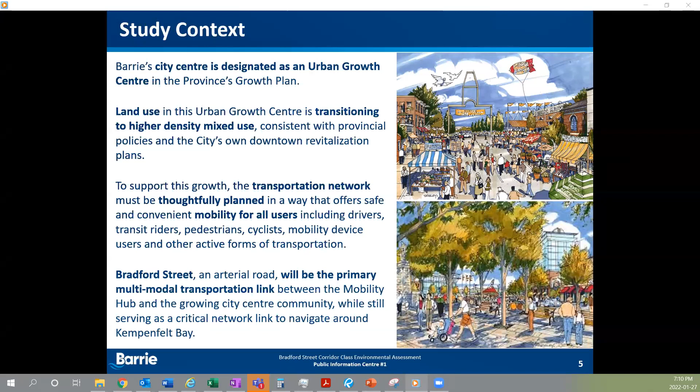To support this growth, the transportation network must be thoughtfully planned in a way that offers safe and convenient mobility for all road users, including drivers, transit riders, pedestrians, cyclists, mobility device users, and other forms of active transportation. This study is focused on long-range corridor planning to confirm future multimodal needs on Bradford Street.

Multimodal transportation planning considers the needs of different road users to plan for and build a network that offers transportation options that are accessible and effectively integrated. This study is considering the future needs of active transportation users, transit, and vehicles over the next 3 decades.

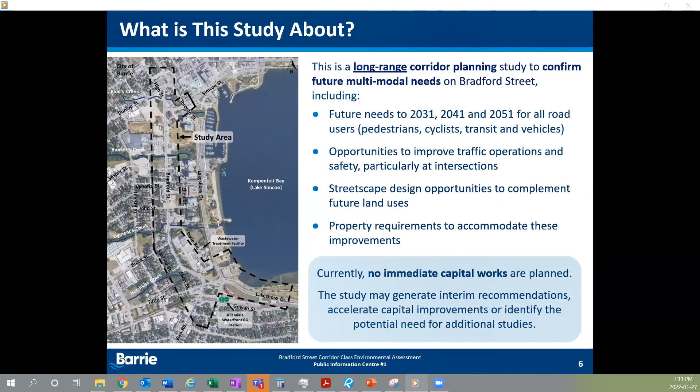The study will also identify opportunities to improve traffic operations and safety, streetscape design to complement future land uses, and the property required to accommodate these improvements. Currently, no capital works are planned for Bradford Street. However, this study may generate interim recommendations that could be considered in the short term.

The Municipal Class Environmental Assessment process is a planning and approval framework for municipal infrastructure used to identify possible adverse effects of proposed infrastructure projects on the environment. Given the scale of the study, our Class EA process has 4 primary phases, each with opportunities for agency, public, and Indigenous community engagement. We are currently in phase 2 of this process and are hosting this PIC to review

the background information gathered and problems and opportunities identified in phase 1, and the alternative solutions that are being considered in phase 2. Based on the feedback gathered through this PIC, the alternative solutions will be assessed and the preferred solution for the corridor will be confirmed and presented at PIC number 2.

Thereafter, the study will progress to developing design alternatives in phase 3. In phase 4, an environmental study report will be prepared to document the study recommendations and decision-making process. This report will be available for public review at the end of the study.

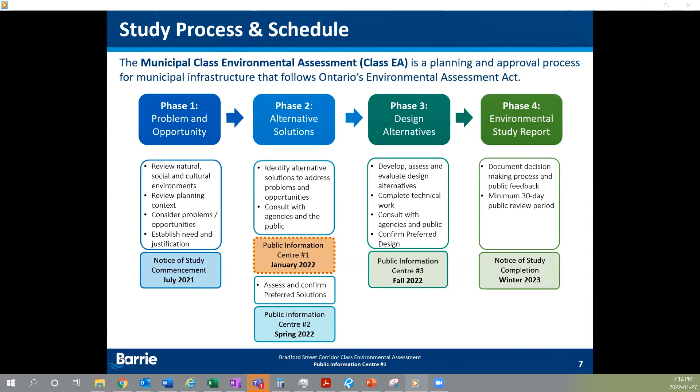Barrie's growth forecasts are based on the province's growth plan. Barrie is currently planning for a population that will almost double in the next 30 years. The city's urban growth center will be the focus of intensification to accommodate planned growth.

The city will manage this growth through the construction of high-density, mixed-use developments in the city center and improving access to more sustainable mobility options like walking, cycling, and transit, while creating safer and more attractive streets.

Taller residential buildings will be encouraged, which will capitalize on the nearby waterfront as a key development attraction. Residential developments will be accompanied by commercial spaces that enable people to live and work within a completed, urban-friendly, walkable community.

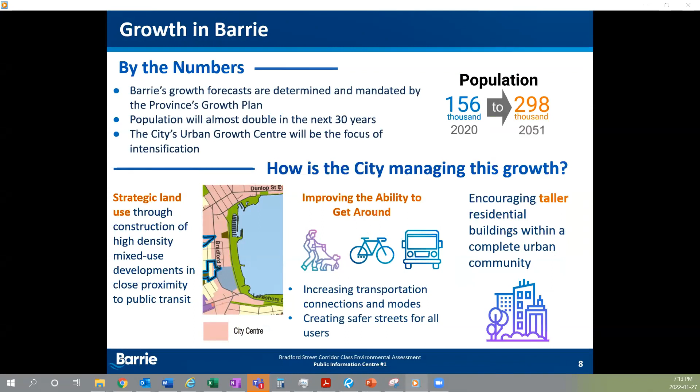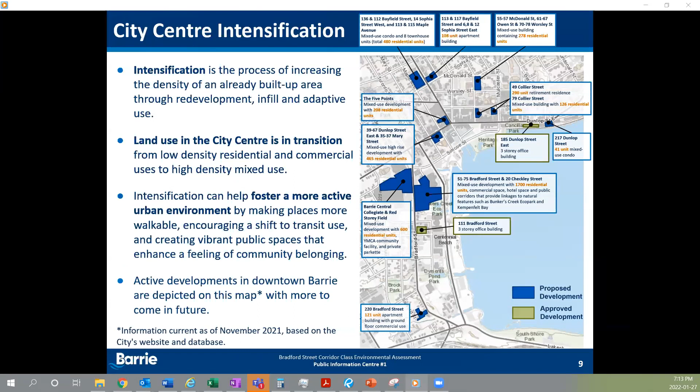Intensification is the process of increasing the density of an already built-up area through redevelopment and infill. This slide illustrates the intensification underway in Barrie's downtown. Active developments are highlighted in blue on the map. This intensification will help foster a more active urban environment by making places more accessible to walking and cycling and creating more vibrant public spaces to enhance a feeling of community.

The city's 2019 Transportation Master Plan, or TMP, provides direction on transportation investments to 2041, with a focus on providing safe, efficient, and accessible mobility choices. For Bradford Street, the TMP includes a few key findings and recommendations.

The existing 4 lanes will provide capacity for traffic volumes forecast to 2041. Therefore, no new travel lanes are being proposed. There is a desire to attract traffic away from Lakeshore Drive. Therefore, Bradford Street must offer a good level of service for vehicular traffic and transit. Space should be protected for a 2-way center left turn lane or median to provide flexibility in meeting future needs.

Tiffin Street intersections operate poorly now, and this issue will continue to worsen. Therefore, intersection improvements are needed.

There is also a need to enhance mobility and provide a sense of livability and safety in the streetscape. Cycling facilities and an improved pedestrian and street environment are required to support these objectives.

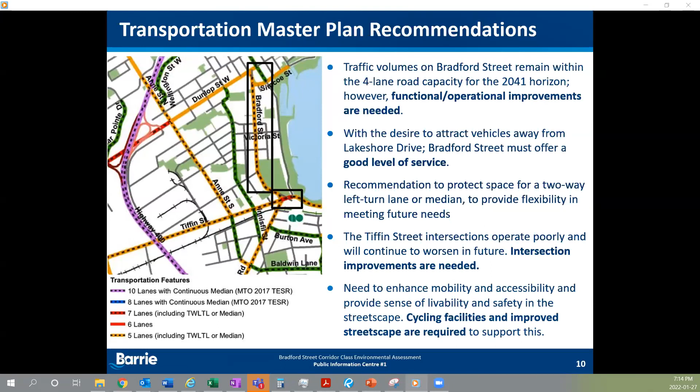Building on the TMP, the Bradford Street Class EA will be taking a closer look at traffic operations in the corridor to 2051 to identify further issues and needs. This could include intersection reconfiguration, additional turning lanes, traffic signals and signal timing, and/or other modifications.

The city's TMP also includes a comprehensive active transportation strategy that provides a blueprint for enhancing walking and cycling infrastructure, accommodating planned growth, and improving mobility options and equity. The TMP recommends a cycle track on Bradford Street, which is aligned with the city's vision to offer a continuous, well-connected, and safe active transportation network for residents and visitors that supports recreational and commuter active transportation opportunities, enhances connectivity to key destinations, and increases mobility for users of all ages and abilities.

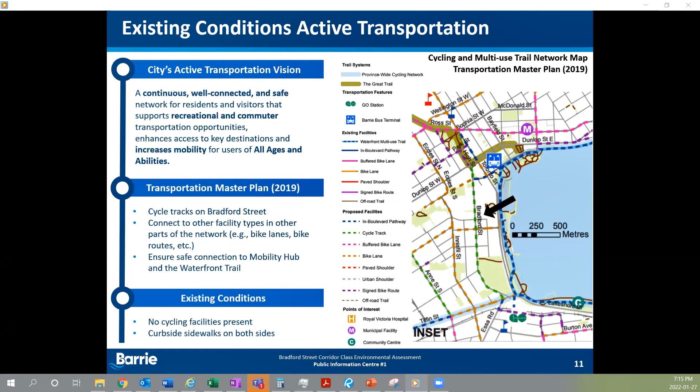Today, there are no cycling facilities on Bradford Street. We will use the recommendations of the Active Transportation Strategy and the recently updated Ontario Traffic Manual Book 18 to develop a cycling facility for the corridor.

Factoring into our decision-making about the future needs of Bradford Street is the Allendale Mobility Hub, an interregional transit hub at the Waterfront GO station, to coincide with the arrival of all-day GO service to Barrie. This transit hub will provide a geographically centralized hub within the city and increase transit access to the GO station.

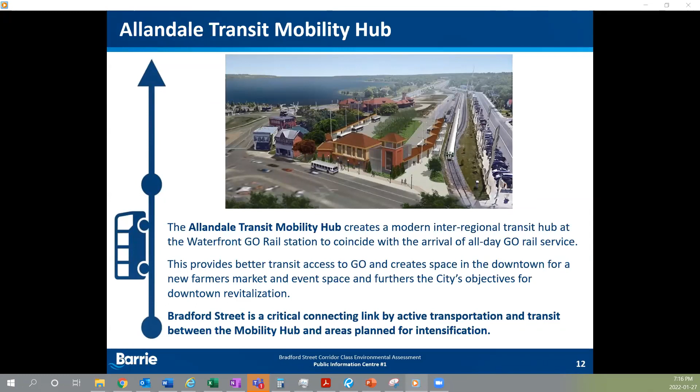Bradford Street will be a critical multimodal transportation link between the mobility hub, the downtown mini hub on Maple Avenue, and areas for planned intensification.

The next few slides focus on the existing conditions of the corridor, starting with land use. The existing land use around Bradford Street is a mix of low-density residential houses and commercial businesses, with some institutional uses, including city offices and the Barrie Wastewater Treatment Facility towards the south end of the study area.

As we have highlighted on previous slides, land use along Bradford Street is planned for transition to higher density mixed use, consistent with the city's official plan. We are taking an integrated approach to transportation planning in that we are considering not only potential impacts to existing land uses, but we are anticipating how the future community will look and their needs.

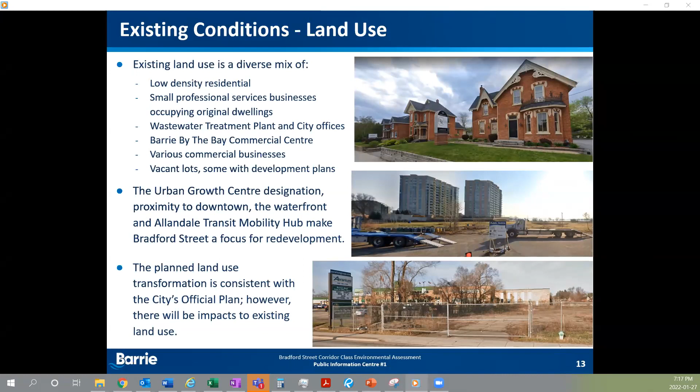A review of the natural environment is being carried out in support of this study. Natural environmental features in the study area are limited to four creeks flowing into Kempenfelt Bay. These creek corridors are narrow and consist of culturally influenced vegetation communities typical of urban settings. There were no species at risk or potential habitat observed in the study area, and habitat potential is limited to urban adapted wildlife. As the study progresses, we will identify potential impacts to these watercourses and recommend mitigation measures to protect the natural features.

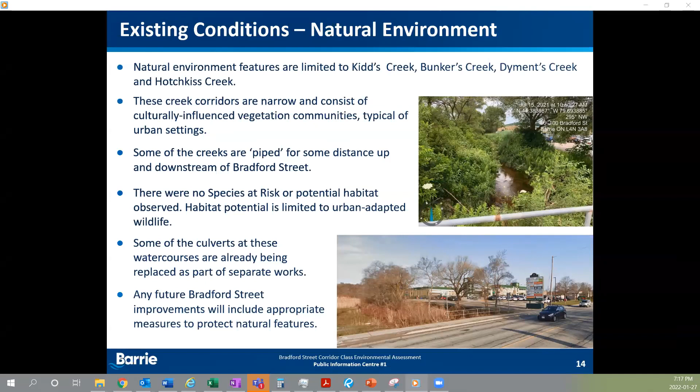A cultural heritage report has been prepared to inventory known and potential built heritage resources and cultural heritage landscapes in the study area. Background historical research is used to determine the presence of sensitive heritage features that correspond to 19th and 20th century settlement and development patterns.

In addition to this research, the Ministry of Heritage, Sport, Tourism and Culture Industries screening tool and professional expertise is used to identify properties as potential built heritage resources and cultural heritage landscapes.

A number of potential and known heritage resources have been identified in the study area, including three properties on the Municipal Heritage Register. The Allandale Station, designated under the Ontario Heritage Act, is located adjacent to our study area.

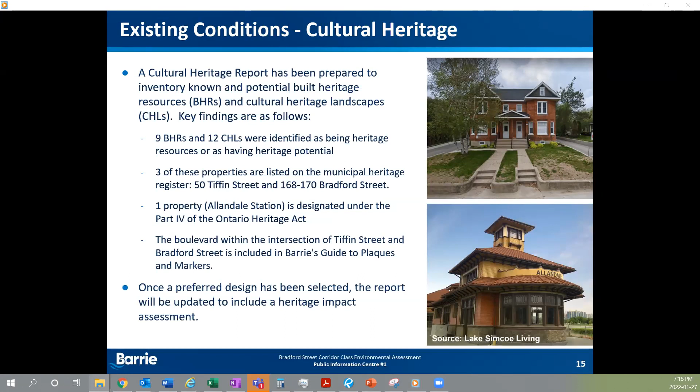Heritage resources will be considered through the decision-making process. Once a preferred design has been selected, the report will be updated to include a heritage impact assessment and recommend mitigation measures. This map depicts the location of identified built heritage resources and cultural heritage landscapes in the study area.

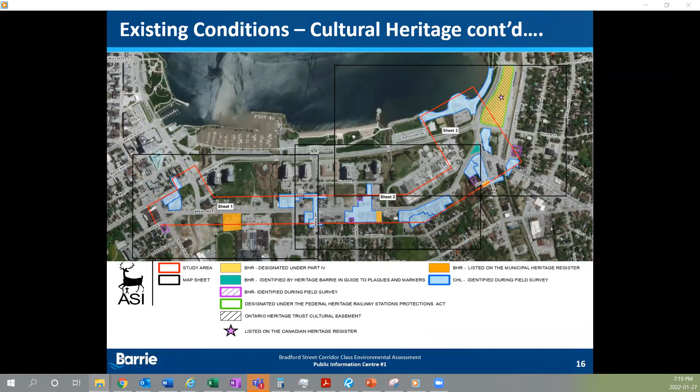A Stage 1 archaeological assessment has been completed for the Bradford Street corridor to assess archaeological potential and confirm where further archaeological assessment is required. Some properties where redevelopment is already proposed have been previously assessed and will not require further study. Other areas exhibit archaeological potential and will require a Stage 2 assessment prior to any future construction.

The Allandale Station is an ancestral Huron-Wendat village and ossuary with established cultural heritage value. A Stage 4 archaeological excavation is in progress, and outcomes will inform the remaining work and detailed recommendations for the remainder of the property. The city is extremely sensitive to the cultural heritage significance of the Allandale Station lands.

If any potential impacts are proposed in this Class EA study, all appropriate work will be undertaken to protect cultural heritage values in partnership with Huron-Wendat First Nation and the Williams Treaty First Nations.

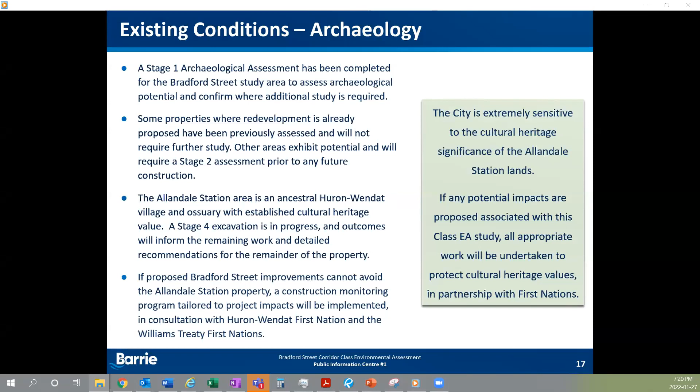This slide provides an overview of the general transportation conditions in the corridor. Bradford Street serves an arterial function in the city's downtown, providing a north-south connection around Kempenfelt Bay.

The existing roadway generally has a 20-meter right-of-way with 2 travel lanes in each direction and curbside sidewalks on both sides of the street. The posted speed is 50 kilometers per hour.

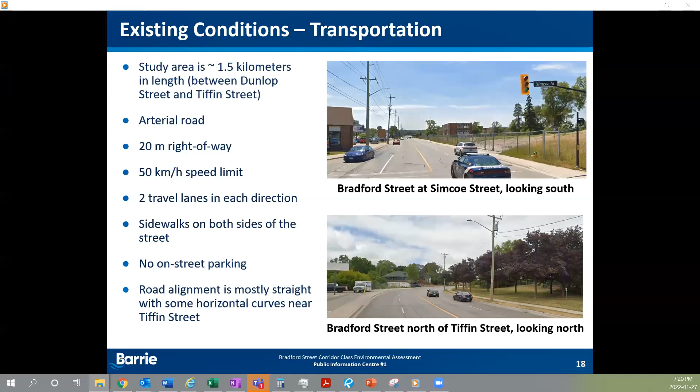The city's 2019 TMP considered future overall travel demand in the city at a network level and confirmed the 4-lane road capacity on Bradford Street is adequate for future growth up to 2041.

As part of this study, we are taking a closer look at intersection operations to better understand the specific needs in the area in 2031, 2041, and 2051.

In particular, the Tiffin Street intersections at Bradford Street, Essa Road, and Lakeshore Drive will become very congested with long delays and potentially unsafe operating conditions.

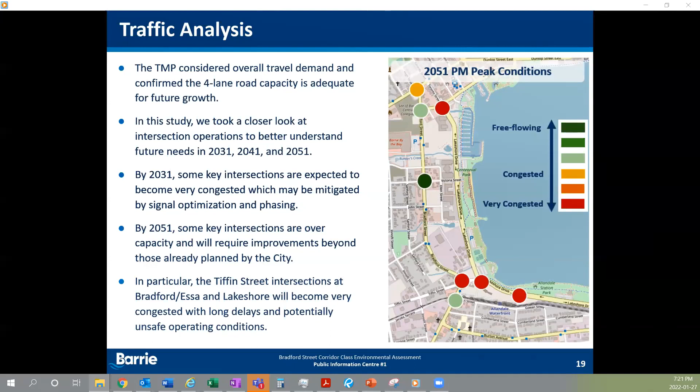The intersections at Tiffin Street are essential nodes in the transportation network because they facilitate movement around Kempenfelt Bay. In recent years, increased demand paired with the physical configuration and short distance between the intersections is causing a number of operational issues at this location.

The traffic analysis indicates that these operational issues will continue to worsen in the future, and the intersections are expected to be operating beyond capacity by 2031.

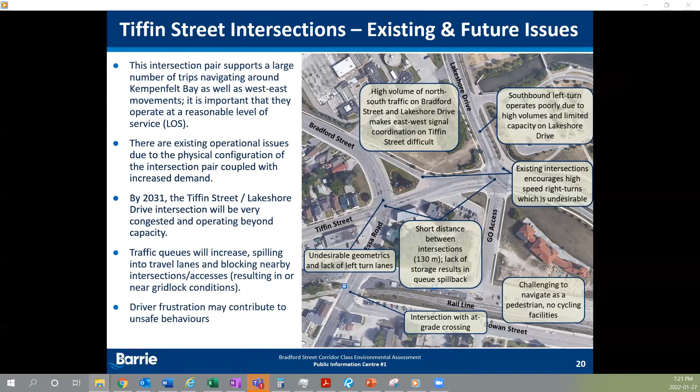Based on the background information gathered and reviewed, the planning context, existing and future conditions, and early stakeholder input, we have identified several problems, opportunities, and needs for the Bradford Street corridor.

These needs include the provision of active transportation facilities for users of all ages and abilities, improving the streetscape to create a vibrant and inviting downtown, and creating a multimodal connection between the Allendale Mobility Hub and downtown.

All the work up to this point has been setting the stage to develop a clear statement of the issues to be addressed by the study.

The overall objective is to continue to provide critical arterial road function and improve sustainable transportation options for users of all ages and abilities. The problem and opportunity statement emphasizes planning for continued community transformation in the city's urban growth center.

The statement also emphasizes the importance of Bradford Street as a critical link within the city's downtown multimodal transportation network, and the existing traffic operational and safety issues that will continue to worsen if not addressed.

And the opportunity to plan for the future needs of Bradford Street now and protect adequate right-of-way to accommodate cycling, improve the pedestrian and streetscape environment, and provide future flexibility for the city to improve the corridor in a way that promotes community activity and vibrancy.

A key question that came out of early stakeholder feedback was whether Bradford Street could be reduced to 2 travel lanes. The project team has included this option among the alternative planning solutions for review and consideration.

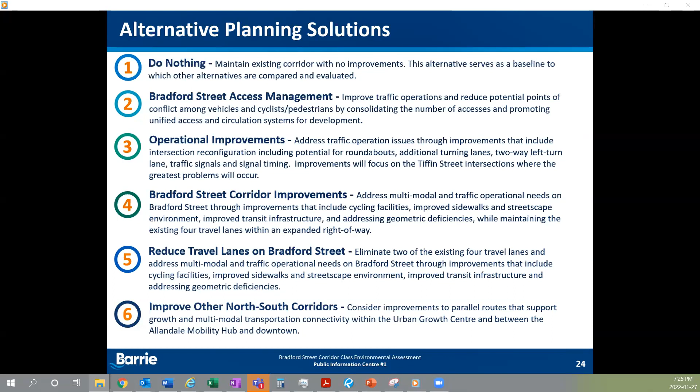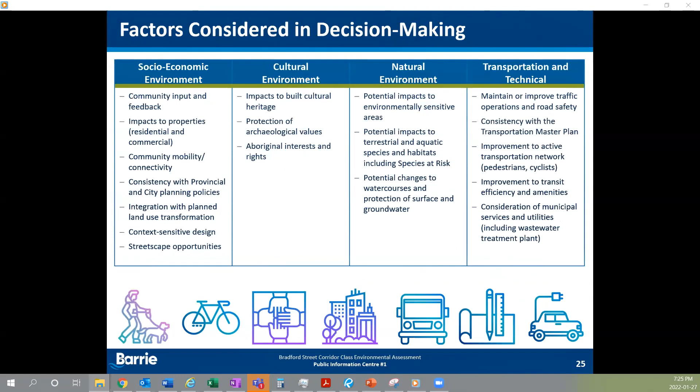The assessment and evaluation of the alternative planning solutions considers numerous criteria across a broad range of socioeconomic, cultural, natural environment, transportation, and technical factors.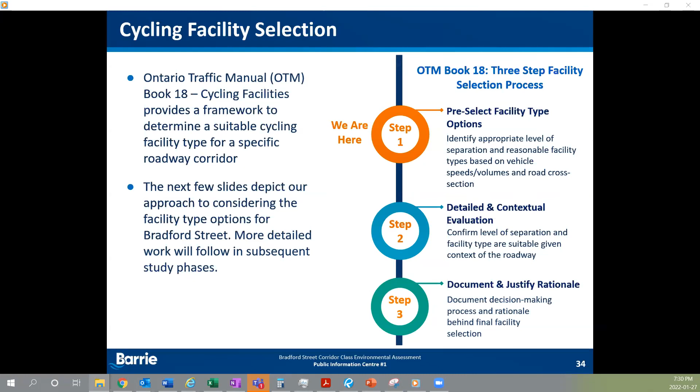Based on the posted speed and anticipated volumes on Bradford Street, physically separated cycling facilities are necessary. These facilities include elements such as curbs, planters, and bollards that provide physical separation between people riding bikes and motor vehicle traffic. Facility types include physically separated bike lanes, cycle tracks, and multi-use paths.

A key difference between physically separated bike lanes and cycle tracks is the elevation of the cycling facility. Physically separated bike lanes are on-street, whereas cycle tracks are elevated above the vehicle lanes. A distinguishing factor of multi-use paths is that they are shared by cyclists and pedestrians. The next few slides will present some different ideas of what these options can look like.

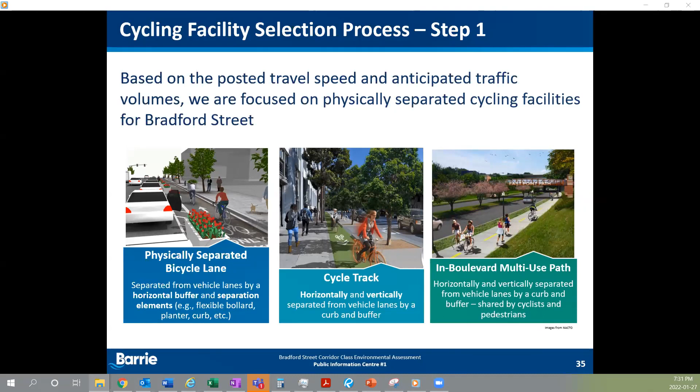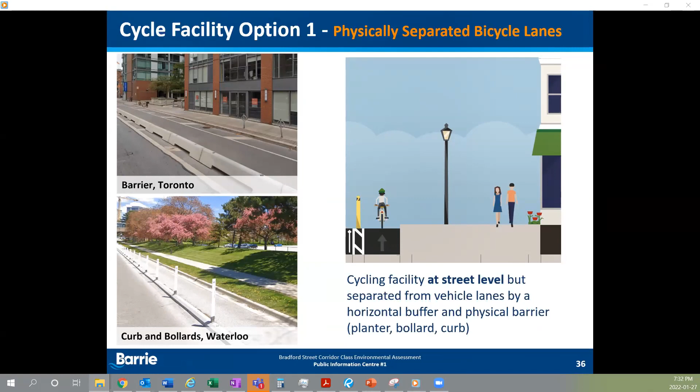Physically separated bike lanes are at street level and are separated from vehicle lanes by a horizontal buffer and physical barriers such as a planter, bollard, or curb. The physical separation provides most cyclists with a more comfortable riding environment compared to shared roadways or conventional bike lanes. It may not be as inviting as a facility that is horizontally and vertically separated from vehicles.

Cycle tracks are physically separated bikeways that are horizontally and vertically separated from vehicle lanes by a curb and a horizontal buffer. They are often parallel to the sidewalk, but are designated exclusively for people riding bikes.

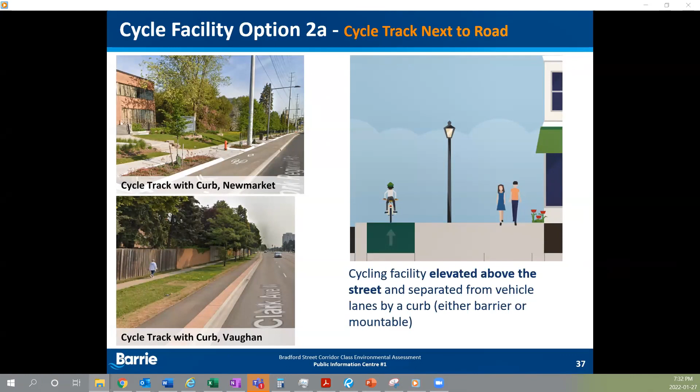We are considering two different locations for the placement of the cycle track in the Bradford Street corridor. The different placements may offer advantages from an operations and maintenance perspective, such as snow storage and winter clearance. In this example, the cycle track is located next to the roadway. In this option, the cycle track is located between the boulevard and the sidewalk. The boulevard provides more separation between the roadway and cyclists.

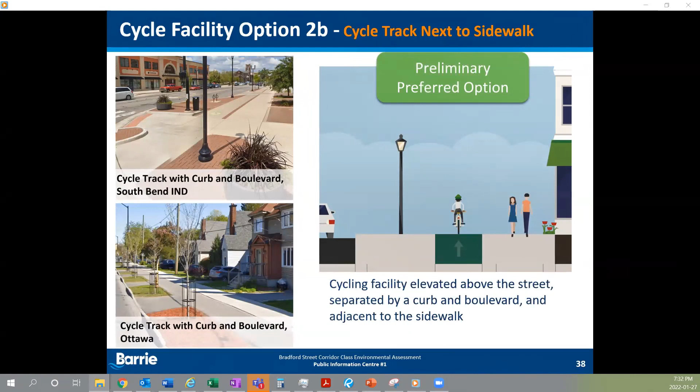In this cross-section, a tactile strip is typically placed between the cycle track and the sidewalk to delineate the separate areas designated for pedestrians and cyclists. Lastly, the in-boulevard multi-use path is horizontally and vertically separated from vehicle traffic.

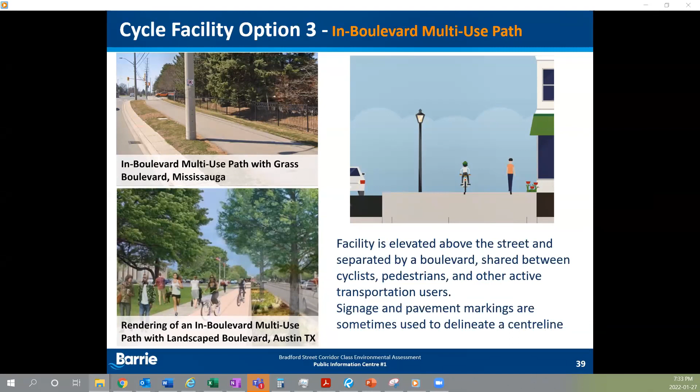This is more likely to occur in higher volume pedestrian areas such as at transit stops or shopping areas.

After we receive feedback gathered from this PIC, the next step is to confirm the preferred solution and the nature of the improvement to Bradford Street corridor. The outcomes of this step will be presented at PIC number 2 to be held this spring. Following the selection of preferred solutions, we will move to phase 3 process and have the design concept be further developed and formally evaluated to identify the preferred design alternative. The preliminary design of the recommended plan will be presented at PIC number 3 in fall of 2022.

After this consultation milestone, the preliminary design and impact assessment will be finalized. Lastly, the environmental study report will be prepared to document the study findings.

Apologies, everyone. We noted that there is a bit of a glitch in our presentation sound right around slide 34 and onward. So apologies for that. As I noted before, the presentation itself is pre-recorded. You can certainly download it from the website again and have a look at those slides. But in a nutshell, the slides that we've gone through between slide 34 to 39 are related to some of the options in cycling facilities.

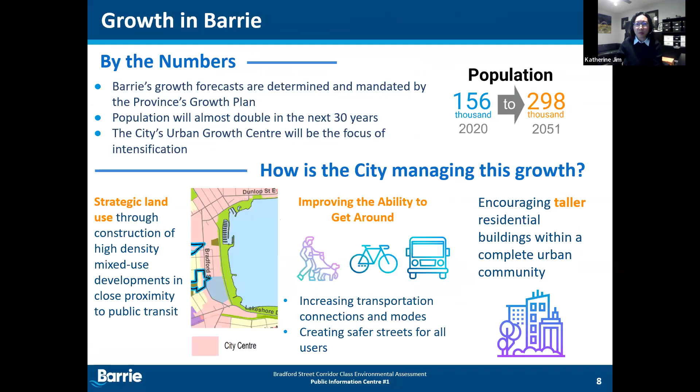Perfect, hi there, thank you. Thanks very much for the presentation. Yes, I have a question regarding, it's kind of a math question. It has to do with if we're increasing our volume of people in the city from 156,000 to 298,000, what is the, how do you calculate the vehicles that attach to those people? And how do you know that the volume of vehicle need is going to be the same?

So maybe with that, Phil, would you mind taking this traffic related question? Yeah, that's a great question, and it's not a linear relationship. We don't assume, for instance, that if we double the number of people in a city or metropolitan area, the number of car trips is going to double as well. In fact, we apply a factor to assume that with an increase in city size, there's going to be what we call a modal shift to more transit use.

So that is an assumption that's been made here. For instance, the city had a transportation master plan that was carried out a number of years ago, and a lot of the assumptions we carried through in this study followed from that study. That transportation master plan formed the basis of what you see in the diagram on the left, the number of lanes for some of these major roads and things like that. Bradford Street was part of that transportation master plan, and a lot of the major roads like Tiffin Street and Dunlop Street were also part of it. But the assumption is that as a city center or metropolitan area grows, there is a gradual shift to higher-order modes of transportation like transit.

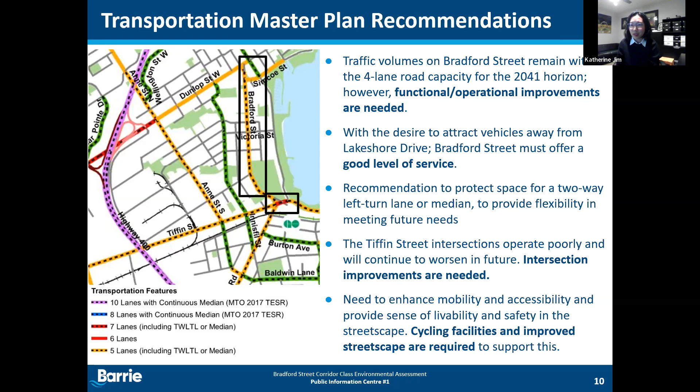So first is about traffic volume between ESSA to Tiffin, with the increase in development coming and increases during May to October tourist season. Have these volumes been included? Are you looking at current numbers? So Katherine, let me know if you're online, if there's anything you want to add. I am online, thank you. Perfect. And I hope you understand the question.

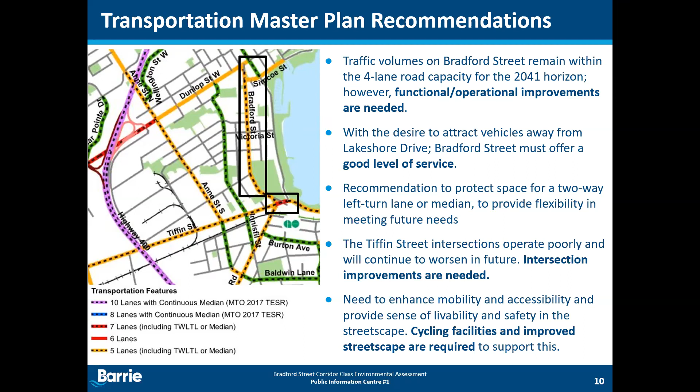I was just trying to remember what the question was and how to frame it. But we have a lot of potential development coming. As you know, there's approximately 8 tall towers coming along ESSA Road at Innisfil, and ESSA, including the Osmington development right up at the 400 in ESSA Road. So that's going to bring a lot of intensification in terms of people and cars. And then over and above that, we have our regular increase in volume of traffic through May to October with tourism, people wanting to come to our beaches and use the beaches and our waterfront. So have those numbers been included? Are you looking at everything? And when was the last time we actually had an actual current study done?

Thanks, Katherine. Yeah, go ahead, Phil. We're pretty confident we've captured things. What we do in these traffic studies is we try to come up with a baseline traffic condition. So what we've done is we've come up with a 2021 base, but we based that on several prior traffic counts. And then we've kind of ramped them all up to 2021, recognizing that these different counts are taken at different times, pre-COVID, of course, and some of them were fall, some were summer, some were different times.

So we've kind of taken them and tried to balance them, right? Because they're taken at different intersections, different times of year, we tend to take the highest of all of them and then balance them so that traffic coming out of one intersection matches traffic going into the next one. So what tends to happen is we take the highest out of all of them and match them so everything balances. That tends to be a conservative assumption, and it generally ends up that we take the highest, which is usually summer or peak season or tourist season. So we're pretty confident we've taken these sorts of peaks into account, and we've looked at pre-COVID and things like that.

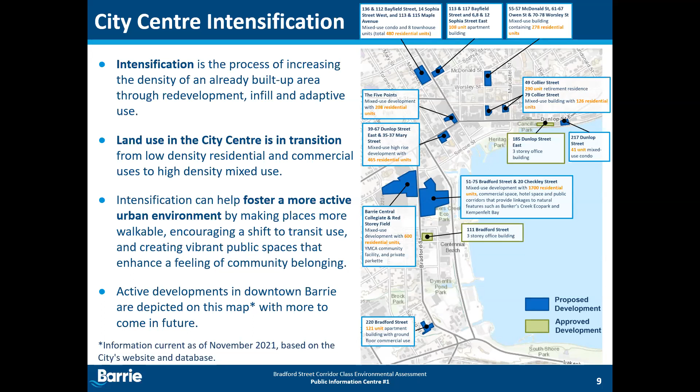Okay, thank you. My second question is related to the roundabout, the one that's closest, like at Lakeshore, not Tiffin, but at Lakeshore. I'll just jump ahead to that. That's quite a large roundabout, obviously.

Would you be looking at impacting the Heritage Corner where the current farmhouse restaurant is and where the buildings are? You would not be in any way impacting those particular buildings? No, neither alternative impacts those. We're being very careful there.

Okay, and do we understand our cycling volumes at this point? Have you done traffic studies on bicycle traffic? I don't see a lot of people out cycling during the winter months and bad weather. We have a lot of bad weather in Barrie through the winter, even with high winds. So I'm really wondering about the cycling volumes we think we might have.

No, we don't have a handle on pedestrian and cycling volumes, and typically they aren't counted when we count vehicles. Sometimes they are, sometimes they aren't, but cycling traffic is typically not captured. But it doesn't really matter, because we assume cycling volumes are significant enough that we have to account for them. Whether it's 10 cyclists or 100, we're going to design for them, and no matter what they are now, they're going to increase in the future, so we have to design for them regardless.

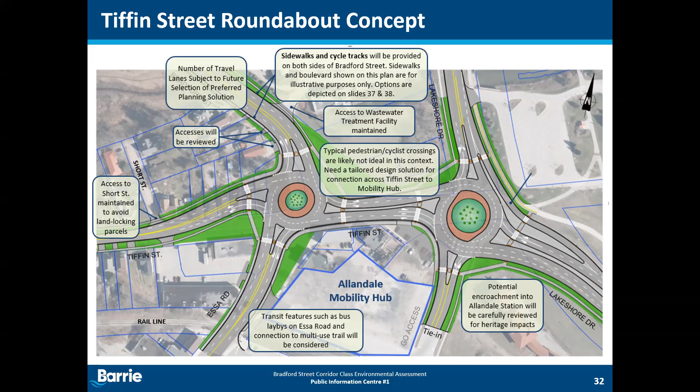Okay, and I did have one last question, which I don't think showed up here - on slide 29 it talks about tie-in with the rail crossing at Essa. I just didn't understand what that actually meant.

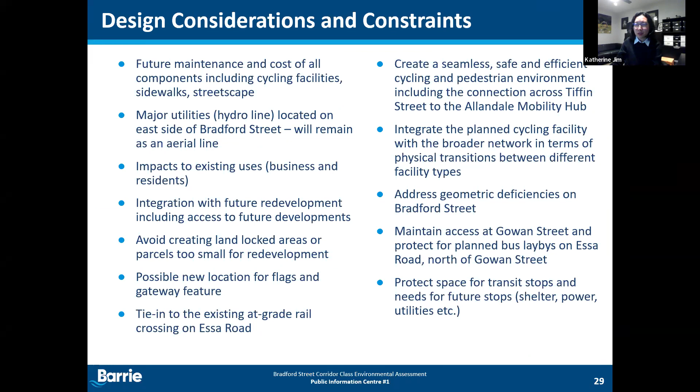Right, maybe I can take that one. Phil, if you wouldn't mind queuing to slide 31 or 32 where we can see Essa and the rail line itself - you see on this figure where it's labeled the rail line. That's actually where the rail tracks cross Essa Road at grade, where the road surface is. So when we think about road design, we can see the intersection skews a little. We're mindful of existing constraints in the area - for example, the rail line is not moving, it's not going anywhere. So the road itself will have to connect to that portion of the south leg of the intersection, basically where the existing rail lines are. That's what we meant by tying into the rail crossing, because that crossing is not going anywhere.

I live and breathe that every day, I live in the immediate neighborhood. Yeah, that's often one of the challenges when it comes to road design - the rail tracks are not going anywhere, so you need to plan around it.

And often we mean in the vertical sense as well, right? So there's not a big hump as you go over it. Exactly, so we're mindful of the elevation, so where the intersection is set there isn't a big drop as we cross the rail line.

I also heard earlier, prior to the meeting, that you will be doing a presentation or coming to a Heritage Committee meeting in March. You're hoping maybe? We're hoping for that. Absolutely, we're happy to come in and have a discussion, and if you folks have any specific questions, let us know in advance and we can queue up the appropriate people if there are really detailed heritage questions. We're happy to come to Heritage Barrie and sit down with you folks to discuss this project in more detail.

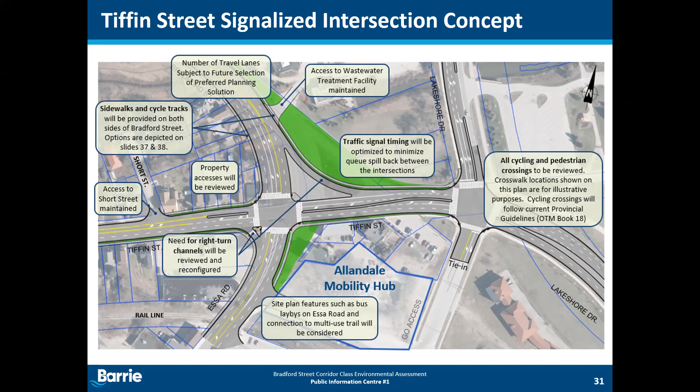Yes, and since this is a long-range planning study, the intent is to really look to implement this further along in the future. We're looking at a potential 20-year horizon, which also aligns with this road's service life—so in that 2040 timeframe, pending any change from council direction, this could always change, but that's where we're at right now. We wouldn't be proactively going in to buy property today, or look to expropriate or purchase homes and do demolitions as part of this effort. It's really trying to frame this corridor for redevelopment and set the stage for us to implement this in the future, subject to an additional study, as these studies typically have a 10-year shelf life, and we're at 2022 now.

If we're looking at implementation, say 2041, these projects typically take 8 years from the start of an EA. So we'd be looking at doing this project in more detail around 2032-33, so we can really lock in what the in situ conditions are on that corridor, what has redeveloped and what hasn't. That's where the rubber really hits the road in terms of squeezing the design so we can mitigate impacts as much as possible. But where we're at right now, we're still quite a ways out, so we want to be a little cautious and conservative, in recognition of the steps to come in the future. Hopefully that answers your question.

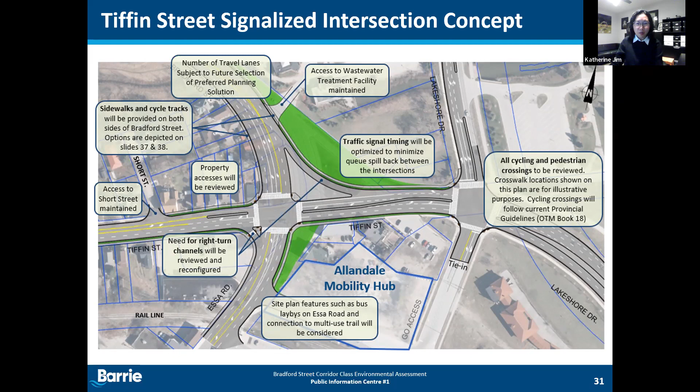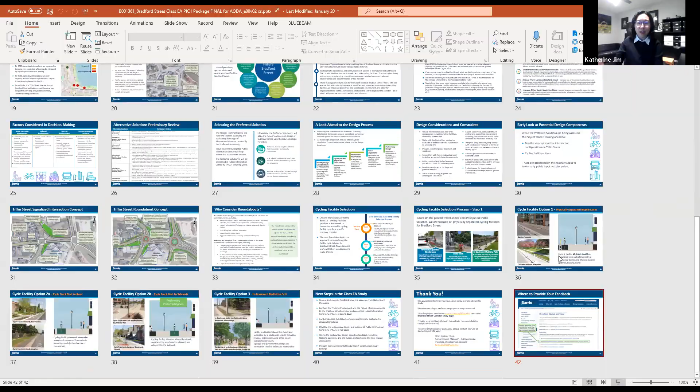We're always here to answer your questions, and we really appreciate everyone's time this evening and your interest in this study. We've had some great discussion tonight, and like we were saying, we're early on, so we're really happy to hear all the input and feedback so we can proceed to the next phase of our study. As you saw in the next step, our plan is to present the preferred planning solutions at our next public information center, which will be held in late spring 2022. Anyone who has provided us with their email address will be notified of future public information centers.

So Brad, Phil, Gilly, anything you may want to add? Oh, I see Dave Clemens has a question, so I'll just allow him to talk and ask that before we head out. Oh, perfect.

Hi, I live on Toronto Street, and I noticed there's emergency vehicles that go down Bradford and Lakeshore. The other question I have is, when the 400 has an accident on it, it ties up all the traffic here tremendously.

Thanks, Dave, appreciate that question and comment. Typically I can't speak for how they exactly take their route, they probably do frequently use Bradford, but I'm sure depending on where they're going they might use Lakeshore as well. We have reached out to emergency services to have a discussion with them, so we'll definitely loop back. And that's also, although we don't design for that kind of event, it's definitely a consideration - even if the 400 is closed down, or on a busy Saturday or Sunday when folks are going to the cottage or coming back, if traffic's slow on the 400, a lot of folks infiltrate the downtown, take Blake, take Lakeshore, out to Essa or other routes. I live in the area as well, and it can be quite slow, so it's definitely something we're thinking about.